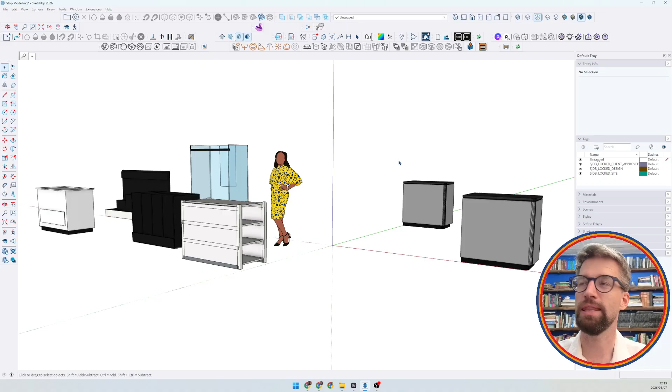Then we looked at why AI modeling often gets things wrong. And then we built our own tool, and we expanded this into a system.

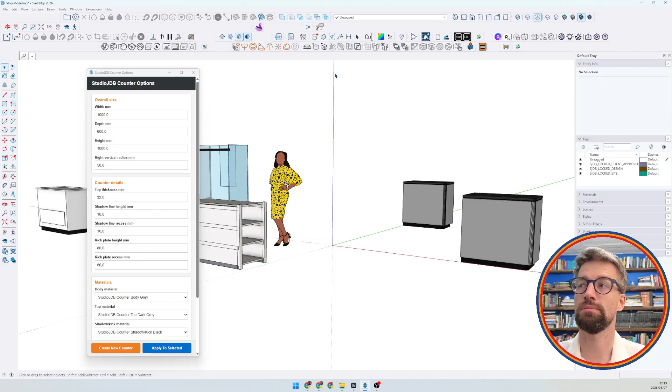I think this is where things start becoming really interesting. Because maybe the future isn't about downloading more plugins. Maybe it's about building tools around the way you think. Not someone else's work or their workflow, your workflow.

AI isn't replacing designers, it's amplifying how we think. The value is no longer just in drawing geometry, it is in defining systems.

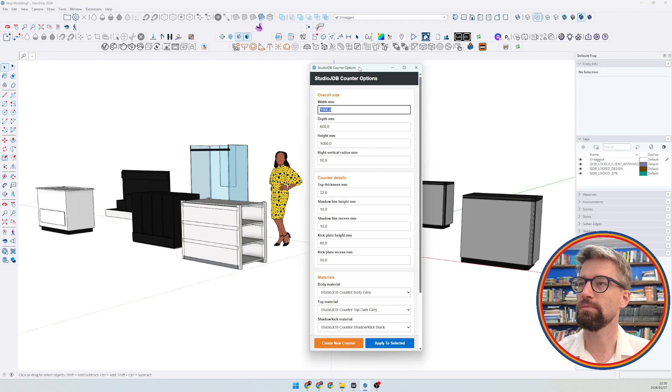Because once the logic exists, you can generate endless varieties, and they all stay correct.

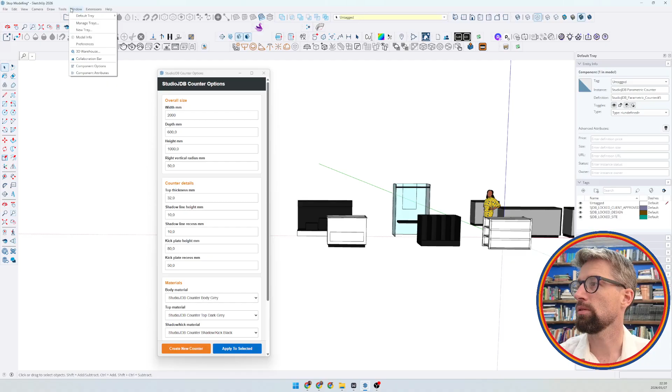Now, imagine this at scale. Retail rollouts, exhibition designs, and architectural components. This isn't just about one counter anymore.

This is about designing the logic behind the objects.

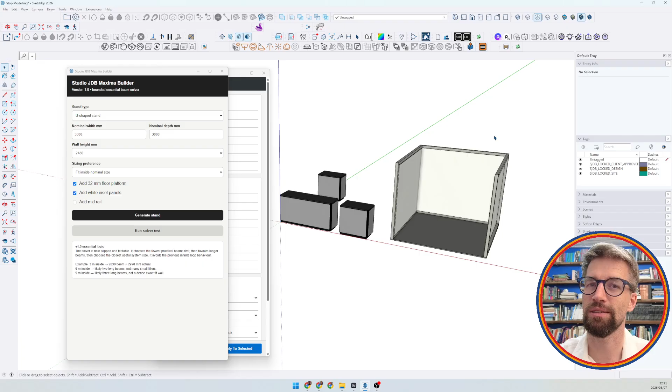This started as an experiment, but I genuinely think that this is the beginning of a different way of working. Not modeling objects, but designing systems. Not drawing geometry, but defining how the geometry behaves. Don't just use the tool, define how it works.